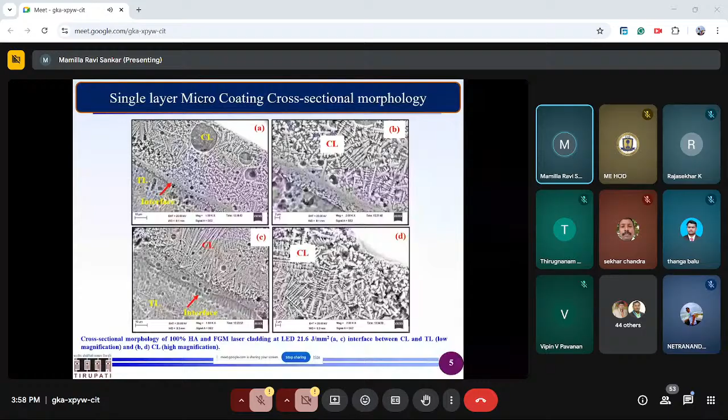Once you understand the surface morphology, we have multiple target materials also. So when we want, we can make FGMs. FGM stands for functionally graded materials, or functionally graded coatings; you can also say FGC or FGM. Once you understand the surface morphology, you can also go for surface metallurgy and other things.

Titanium is a highly reactive material, and at the same time a low thermal conductivity material. The good thing about it is that you will have a better transition layer, which means proper bonding and so on. Once you coat, you can also check with elemental mapping. Many mechanical engineers may not be well aware of elemental mapping. When you use SEM or FESEM, you have four options in EDS, energy dispersive spectroscopy: point analysis, line scan, area scan, and area elemental mapping. What you can do here is area elemental mapping.

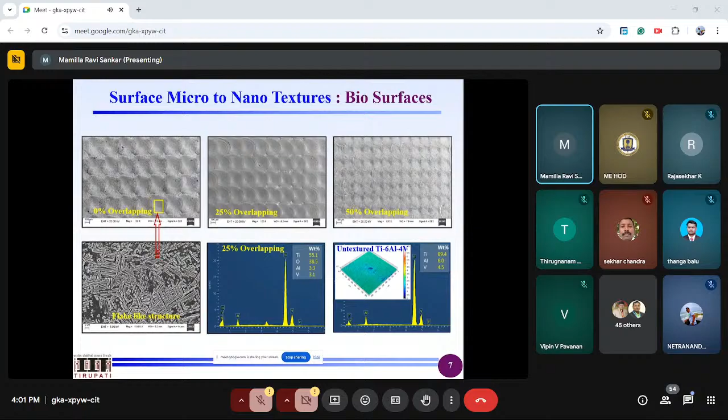I cannot say it is fully a new generation tool, but when you go to nanosecond or femtosecond lasers, these types are predominantly coming into picture now, and without much heat affected zone or recast layers, surfaces can be textured properly, as you can see here. Texturing can happen as per our requirement, but you need to play with the overlaps of the laser beams and so on.

Once you play with the laser beams and texturing, you can coat the materials required for orthopedic applications, and then look into the biocompatibility, as shown here.

What do we mean by biocompatibility? Whenever you place an implant inside the body, it interacts with the surfaces, similar to how mild steel put into water under environmental conditions forms a rusting oxide layer. In the body, this interaction forms an intermediate layer called the apatite layer, through which proteins and minerals can be exchanged with body fluids. That's the most important thing.

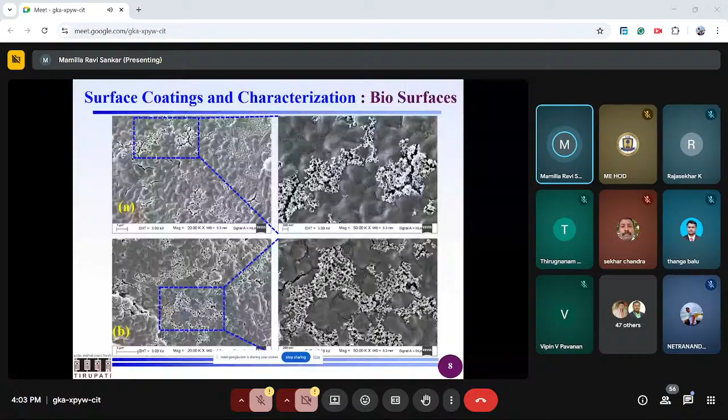When you test surfaces in artificial SBF, simulated body fluids, under in vitro laboratory conditions, you can express the surface in terms of the apatite layer. The flower-like white layers you see are called the apatite layer, which confirms this is a perfect surface for biocompatibility applications.

That's why you can then move into the next arena of cell cultures using MG63 osteoblast cells and so on, which is not shown here due to time constraints.

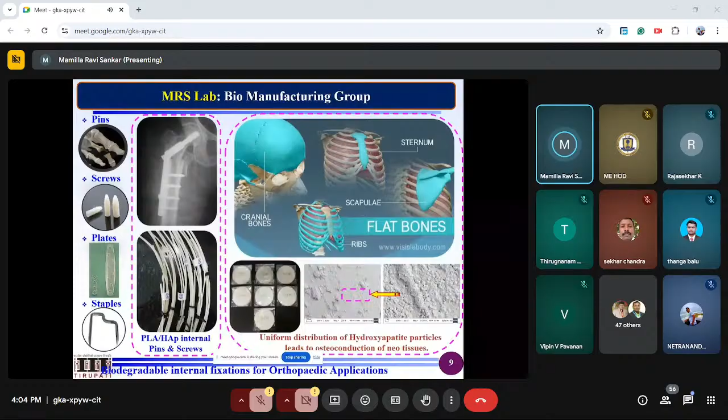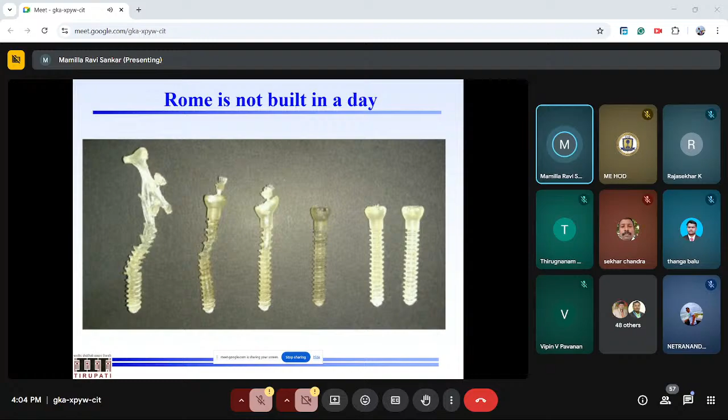Then we have another solution where we try to do biodegradable polymers for bioimplant applications. We develop these polymers in association with chemical engineering at IIT Guwahati, not IIT Tirupati, at this point of time, doing in situ polymerization as well as removing impurities from the surfaces. Then you can make the filaments and the implants basically.

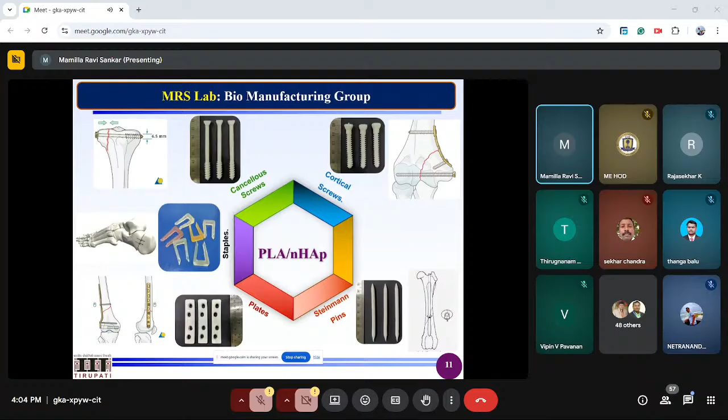This is not built in a day; it's not that easy to make as per ASTM standards in one go, because you need to play with temperature, flow rate, molecular weight and so on. So we optimized the melt flow conditions, for which rheology plays a crucial role, and then we try to make cancellous screws, cortical screws, Steinmann pins, staples, bone plates and so on.

The advantage is you can put it inside the body and don't take it out, so secondary operations may not be required. There is another solution that we are working on.

When there is a fracture, can I make an implant? You cannot always make an implant because the structures of fractures are very niche, micro or nano, and very complex in nature.

For this type of case, one has to develop rheological fluids. What are rheological fluids? As I said, we mostly work on polymer rheology, so we developed a thermosensitive magnetic scaffold for bone tissue engineering.

So what it means is you have a liquid at room temperature, about 25 degrees, and when you incorporate it inside the bone fracture, it has to reach the nooks and corners of the complex fracture surface, where you wouldn't need staples, cortical screws, cancellous screws or bone plates. You don't require the system you see here with bone plates and screws; instead you have support from the flesh, so you just push it in.

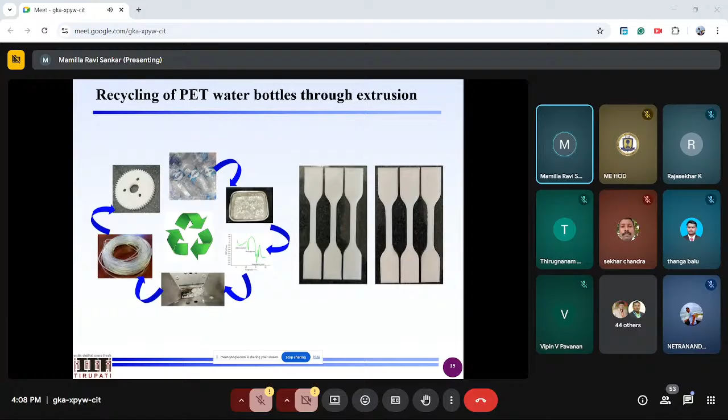So we have a machine called Lumen X Plus, which is from Cellink USA. Those who want more details, I will show you at the end what facilities we have. So we have Lumen X Plus, and BIO X also we are going to procure.

Sustainable additive manufacturing is what we try to do - we make plastic waste into 3D printable solutions, which is common. I'm not saying this is novel or something. What we try to do is make our own solutions for making filaments basically.

Here the good thing is, for biological hip implant, knee implant applications, many people are approaching us from various universities and industries for their applications, to make any type of filaments - for biological hip implants, knee implant applications, liners, hip liners, and other things. So we prepare, you name it, we prepare it. You want polylactic acid with carbon fibers, we can make polylactic acid with graphene, CNT, hydroxyapatite, copper, stainless steel, surgical steel - you name any material.

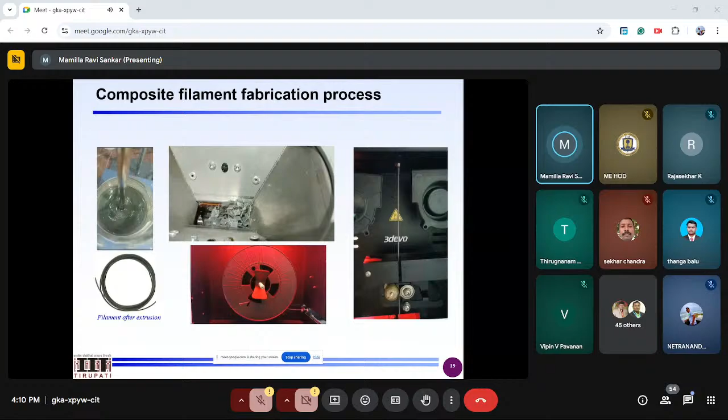Do your literature, come up with novel materials that you want to fabricate your filament for your PhD work or to publish. It's not just about PhD work, if you just want to publish the work, we can prepare it for you. It's a completely commercial system that we have, from the Netherlands actually. So this is the final extrusion filament that you can see here.

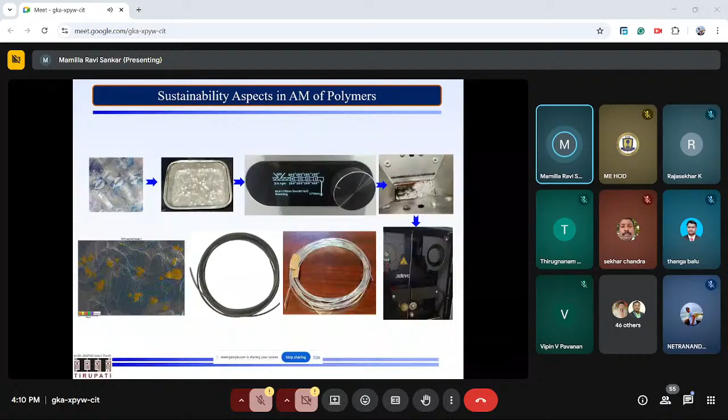So this is just what we are showing you. He is here, this is the one. We can make any type of filament you can see, and you can see at the end what this is previously, where the particles are aligned and how the particles look like here.

Now at the same time, to give you more of a glimpse, scanning electron microscopy images of these particular things you can see here. This can give you a lot of information - we can also make microparticle additions, nanoparticle additions, and nanosheets, whatever graphene flakes you want to use, any type, if you want thermal conductivity based filaments, any type of filaments. We are happy to provide as per custom requirements.

However, as I said, Rome is not built in a day. That means if you want the filament to be fabricated, this fabrication will have a lot of wastage because optimal composition will take a lot of time. Don't expect that today you have given and in a week or two weeks you are getting it. No, because we have a queue of things for our students' applications and so on.

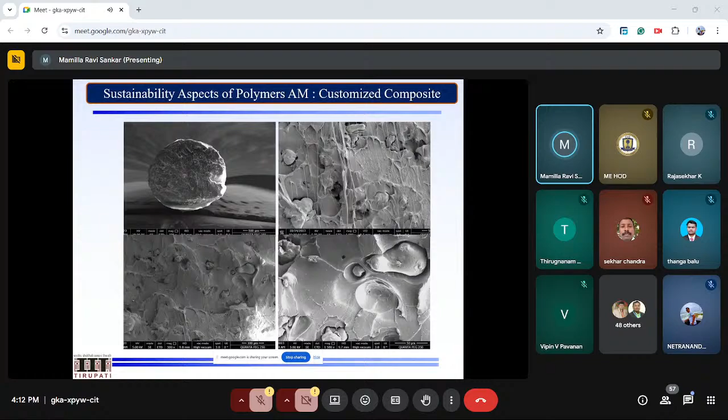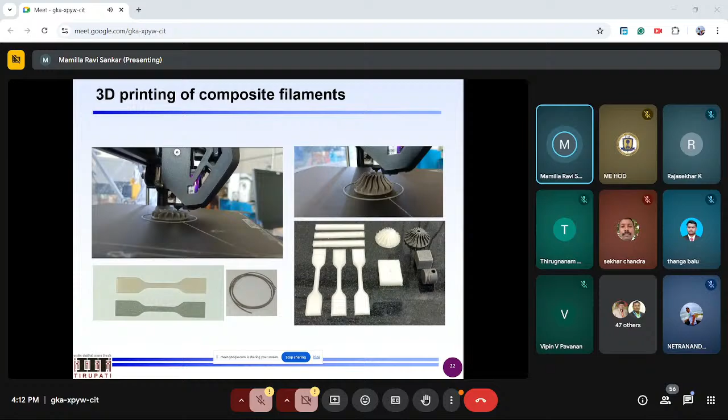At the same time, if I want to understand the melt-rheology of your composition, then first I need to do rheological applications. We have to plot what the melt flow conditions are, and see the loadings and so on. These are all required for your applications. Then we can go and do 3D printing. We have 3D printers, commercial 3D printers, and some customers also ask us to make components out of it.

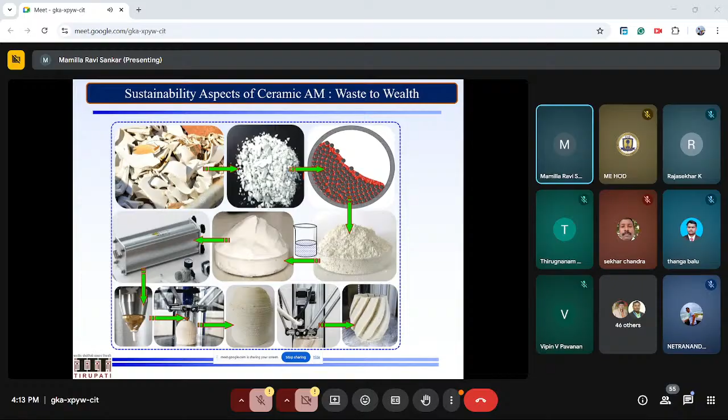So we are building this, and when the building is completed, you can see the component. We also do testing facilities, testing coupons, for companies to check samples and other things.

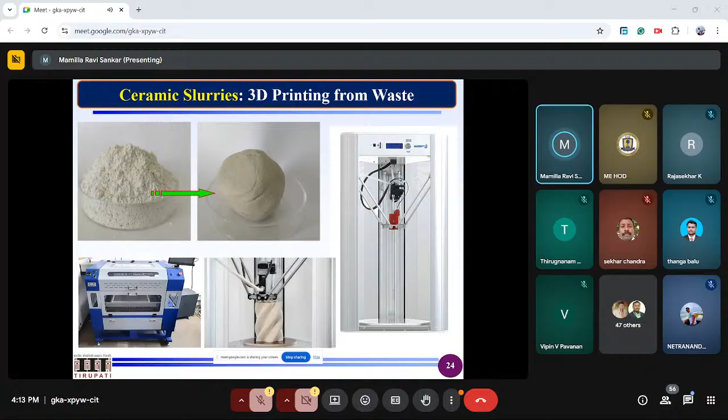Some other thing we work on is waste to wealth conditions. So porcelain powders, we can make into dough. We have two systems: one is the AMS Hyrel system, which as of today may cost around 40 lakhs. Then there's Delta Wasps, which may cost, depending on your application, 20, 25, 30, 35 lakhs and so on.

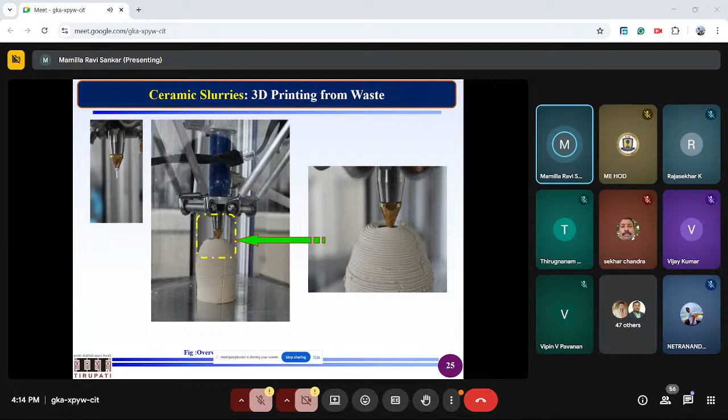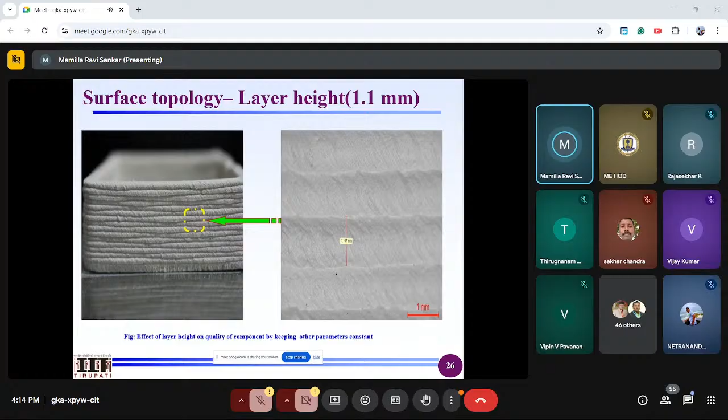And what is the novelty here? When there is a waste material available, as I said, we work mostly with polymers. So we develop polymer binders, and these binders play a crucial role in thermal debinding, chemical debinding, hydraulic debinding, and sintering operations, because you don't want these polymer binders to remain inside the ceramic structures.

As such, you can always create beautiful structures, and for these structures you can see what is the feed rate, what are the rheological conditions, and so on. Once you optimize all these things, you can make your own futuristic or complex component.

These are the complex components you can make with any materials. So what we try to do is develop compatible materials. Our area is purely on development of some binders, because you cannot join porcelain to porcelain directly—that is a big problem with ceramic to ceramic joining. So we always try to have binders for it, and it is not going to be that easy.

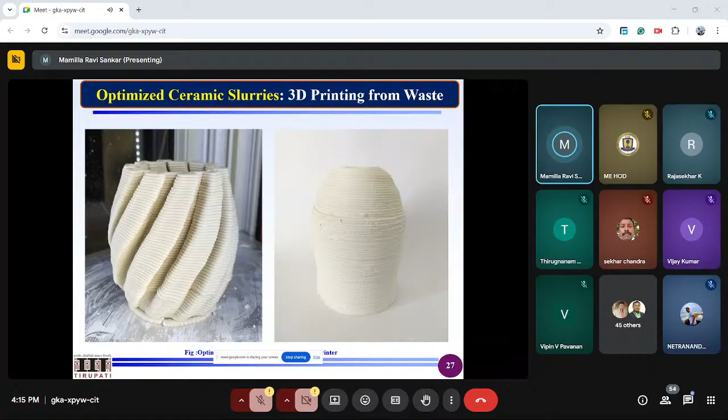One of our students, Palivella Bhargav Chandan, has done this work, and he is currently at IIT Delhi after completing his PhD. So we make binders—you bring the raw materials, we make the binders for you, we can print and show you the technology, and if you want, you can also go and patent the technology.

So as I said, let me start with micro machining. I don't know how much time I have—I think another half an hour maybe. So, sustainable micro machining: we try to work on various aspects, one of which is micro machining.

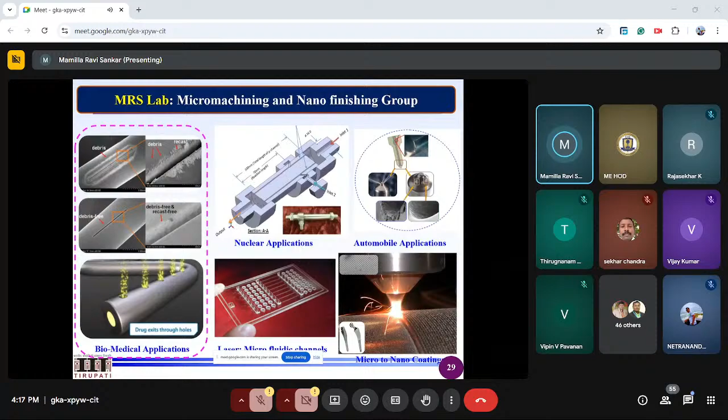My wish is to go up to 4:45 with the question and answer session. Professor, how much time do I have? Another 30 minutes? Please start, yes sir. 15 minutes? Actually your wish is up to 5, sir. What is your wish? My wish is up to 4:45, is that okay, sir, with the question and answer session planned? I plan to conduct the session between 3:30 and 5 p.m., so should I wind up by 4:30? Please, the session will be up to 5, sir, but based on your interest you can continue up to 5 also, no problem. Should I present up to 4:30 or 4:45 and then take questions? 4:45 is convenient for us, sir. So I'll present until 4:45, then start the discussion session, and then we will wind up, sir.

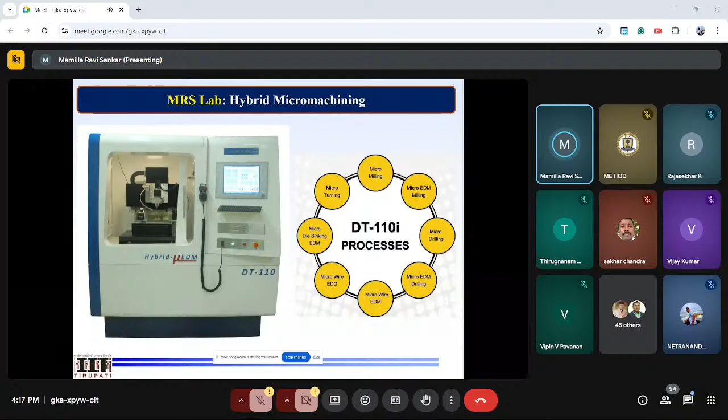Because I have almost 100 slides, I don't want to cover everything as it's time consuming. So, micro machining again—DT-110i, what is an intelligent machine. Whatever you are seeing is DT-110. We have the DT-110i, an intelligent machine comprising micro milling, micro drilling, micro turning, micro EDM, micro EDG (electric discharge grinding), micro ED milling, and micro lasers, with simultaneous EDM and ECM.

We have a lot of attachments.

Okay, so you can see here the beauty about this particular thing is you can make whatever small shafts you want, or electrodes that you can make for machines. For this you require very sophisticated tools such as PCBN tools, micro tools, whose nose radius will be less than 0.1, and other things. Normally, in a turning process, you use conventional cutting tools.

So what you do predominantly is that you will have a variety of cutting tools, like what you are seeing, a triangular cutting tool here. The conventional cutting tool here is the TPUN 160304. These are the common cutting tools, where T stands for triangular, and 04 stands for 0.4 nose radius. Or TPUN 160308, where 08 stands for 0.8 nose radius.

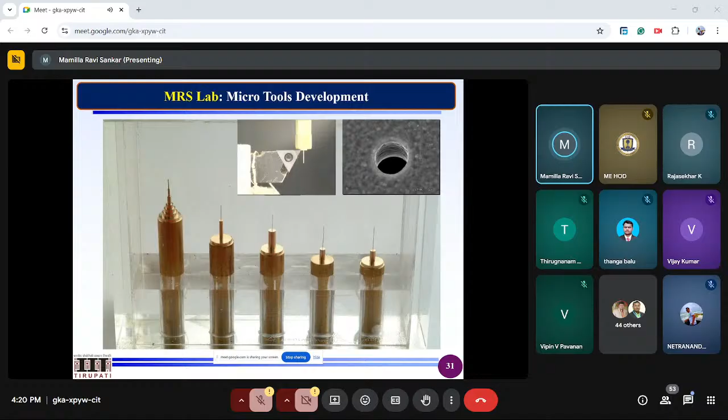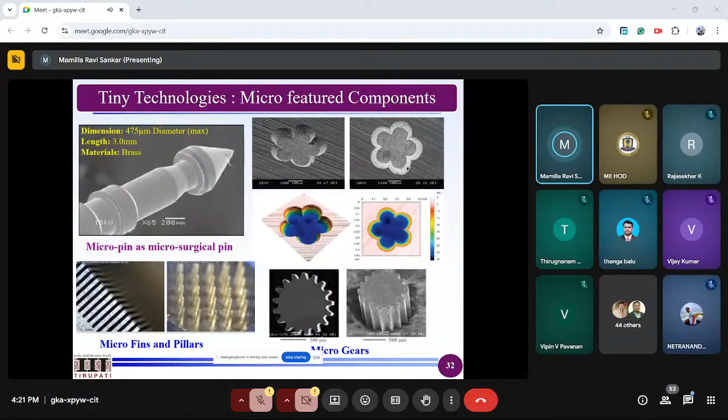So we'll put a slab or a rectangular piece. Now I start, because I have rotation of the workpiece there. Because of electrical discharging while rotating, it is non-contact, and because of that you can make your own tool. Whatever shapes you want, you can manufacture arrays of tools and so on. So if I want to make these, I need to plan my process and my cutting tools in a better way.

As I said, there are applications not only in highly conducting materials but also in low conducting materials like silicon, for semiconductor applications, sensor applications and so on. So if you see here, micro ED milling. Why micro ED milling? Because you can rotate your tool. Otherwise it is only die sinking. That is also there, and this is also there.

If you go for simultaneous EDM and ECM, that is electric discharge chemical micro milling, you get the EDM process of melting and evaporation and at the same time anodic dissolution. The combination of that, which is patented, with the micro tools and the electronic circuit, can do wonders. The surface roughnesses are much better. The application is whenever you want to mount sensors on it.

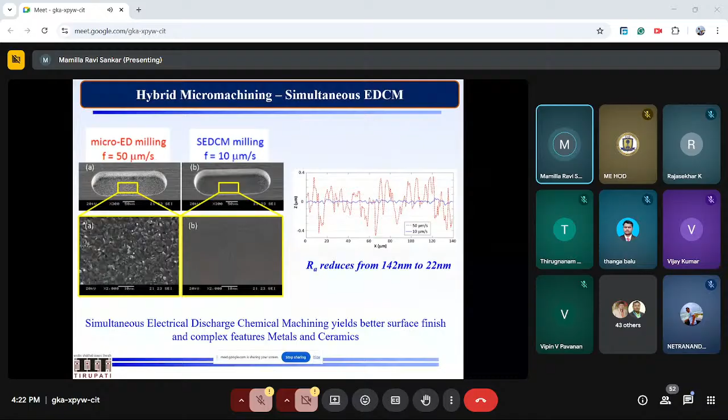If you use the first one, with very rough conditions, these may hamper your signal because a lot of air entrapment will be there. With air entrapment, the noise will be very high. In simple language, if you go for better surfaces, your noise levels will be very low, so the signal to noise ratio will be better. Okay, so this is again a new way of understanding the problem.

As I said, next generation cutting tools. This is one of the next generation cutting tools which are going to come by 2030 or 2040, or Viksit Bharat 2047, you can just say. So this is the biological tool. What is the biological tool here? It is a cylindrical structure basically.

Then on the other side we have copper, which has a positive mask, I mean, photolithography. So you have photolithography done, that you can see here. On one side I have Acidithiobacillus ferrooxidans, on the other side I have a copper plate on which photolithography is done. I have coated and extracted the coated polymer layer in the required dimensions. The required dimensions here is a micronozzle, or at the bottom you can see a micromixer.

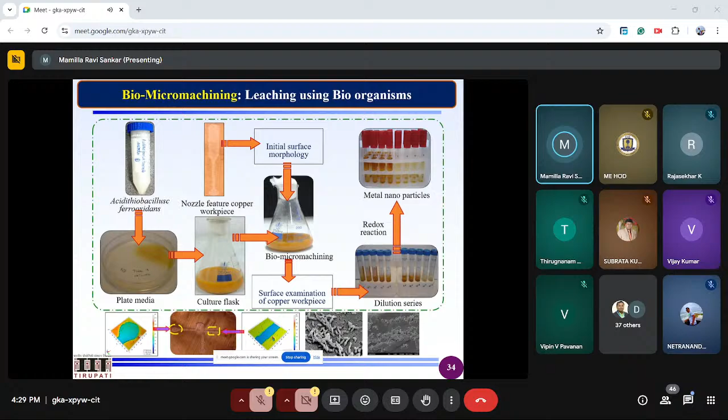So indirectly, if I want copper microfluidic structures and at the same time copper nanoparticles, you can extract both without wasting anything. For that, the future is very bright. Those people who are interested, we are mostly looking for people who work in similar lines. At the same time, we are happy to say that this particular paper got the first best paper award at IIT Madras. We were surprised, in fact, because we got the first best paper award.

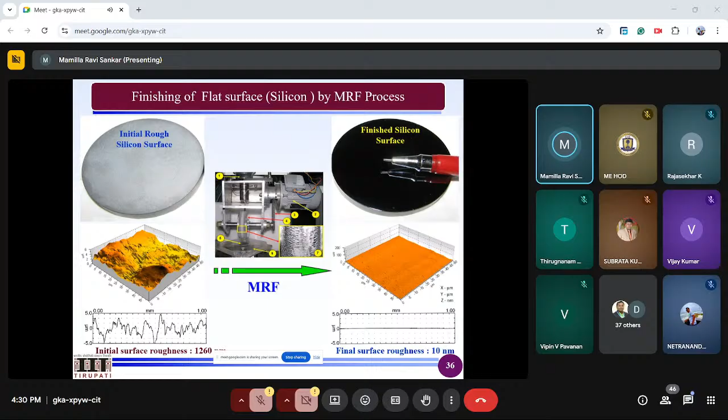There was the first place, second place, and third place, and we are very fortunate and thankful to IIT Madras for giving us first place for this bio micro machining, or micro machining using microorganisms, which is the next generation cutting tools.

So nano manufacturing, as I said, we try to work on some of the abrasive fluids, which you can see here. So chemomechanical polishing, designing of highly reactive materials, and then you play with the magnetic field, so chemomechanical magnetorheological finishing. On one side you have MRF or MRP, magnetorheological polishing, or magnetorheological fluid. Predominantly the fluid will be some oils, some surfactants, abrasive particles, and so on.

At the same time, we will have some agents, which are chemicals, so you can make chemomechanical slurries. And since you have CIP particles, which are carbonyl iron particles, normally 99% pure iron particles, they will form chains from the North Pole to the South Pole, where the diamond particles or any other abrasive particles are entrapped, and you just have to finish it.

So initially, the surface roughness is predominantly high. In these circumstances, you should always go for high magnetic field intensity, say 1 Tesla or above, then you can do the finishing operation. As it progresses, you can play with the electromagnet, where you can change to 0.5 Tesla and 0.25 Tesla, or 0.6 or 0.3 Tesla. So the strength of the magnetic field intensity for the CIP chains lessens as the surface roughness decreases. You don't require high indentation values and so on.

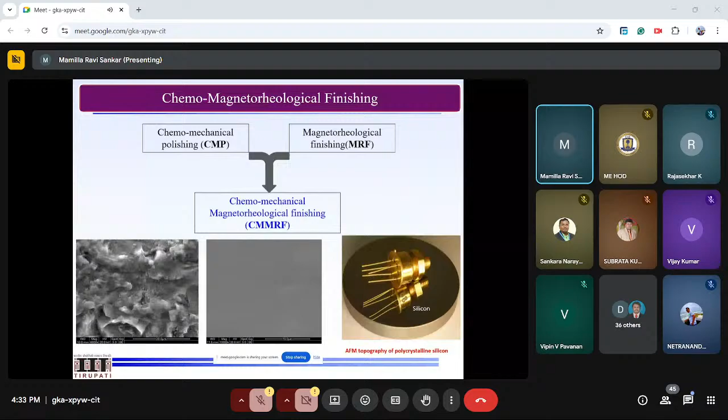So if you're going for 1 Tesla, your grade of the grinding wheel is hard grade. As you progress downward, say 0.6 Tesla, you will have a medium grade. And when you come to 0.25 to 0.3 Tesla, you're going to have a soft grinding wheel where you can do the fine finishing operation. That's the beauty of this particular process: you can get it in situ. In conventional grinding, you require 3 grinding wheels: hard, medium, and soft. However, here you can play with the magnetic field.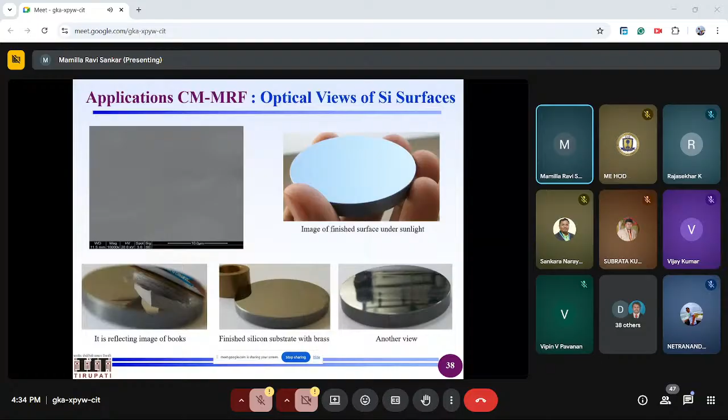As you can see the surfaces, for people looking at semiconductor manufacturing: in the next 5 to 10 years, India is putting a lot of money into semiconductor manufacturing. The world is looking at India for semiconductor manufacturing applications. So for those interested in semiconductor materials, fabrication, and characterization, IIT Tirupati is one of the hubs for testing of electronics. At the same time, we're also working closely with the hubs which are going to fabricate semiconductor materials and so on.

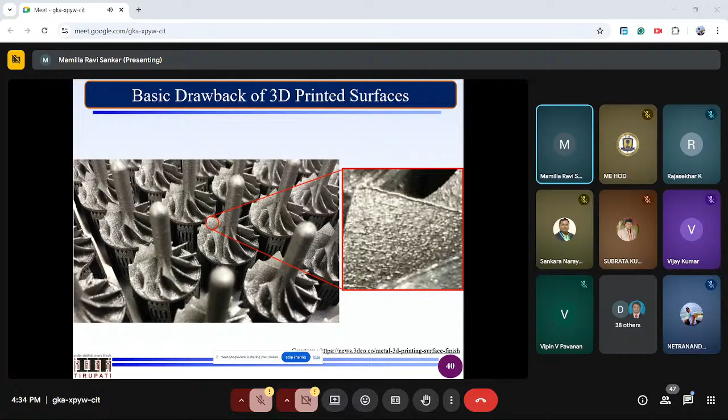So now, if you have time, I'm going to show you the new tools that we have developed. As you see here, surface finish is a big challenge in additive manufacturing, so obviously you need to resolve it. So what we try to do is understand the surfaces. In additive manufacturing, you require very complex surfaces, and you fabricate them by laser powder bed fusion, WAAM, and so on.

If you see the surface under scanning electron microscopy, you see surfaces like this. If you use these surfaces in practical conditions, it will completely destroy the system. That's why whatever 3D printing people do is a partial job, not a complete job. You need a lot of post-processing technologies, and one of them is the finishing process. Why do you need to do the finishing?

So you need to do the deballing. Whatever you are seeing, the spherical balls, it's called balling effect. You need to do the deballing. You need to reduce the roughness, and you need to reduce the waviness.

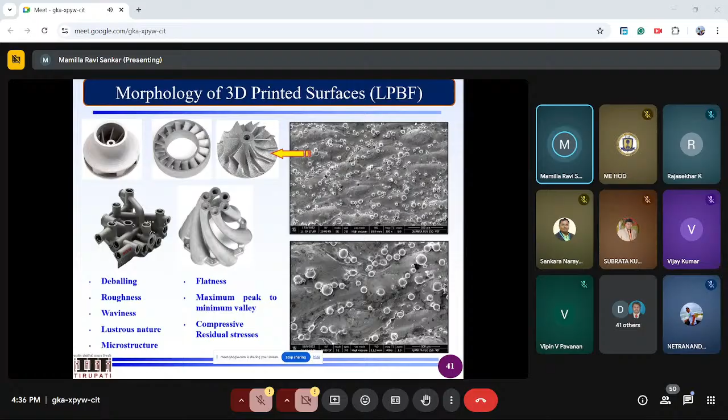So as the world progresses, the complexity progresses, the wishes of humans increase and the requirements of the customers will increase. So as a manufacturing engineer, you should always be ready for the new challenges that you are going to face. So what do we try to do? What we try to do at IIT Tirupati is converting a 3D printed component into a practically usable form.

As I said again and again, 3D printing, having a 10 crores machine, a 20 crores machine, a 5 crores machine, or any machine that you have, is a partial solution for the practical problem. It is not a complete solution. So if you print it, you have done 50% of the job. If you want to put it in a practical application, you need to do a lot of things.

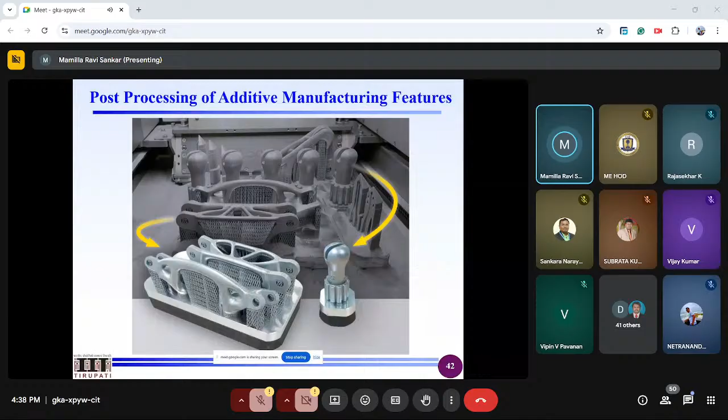Sintering you need to do. Sometimes HIPing you need to do, hot isostatic pressing. Then you need to do finishing. You need to do a lot of microstructure analysis, and so on. So you definitely have a lot of jobs. Okay.

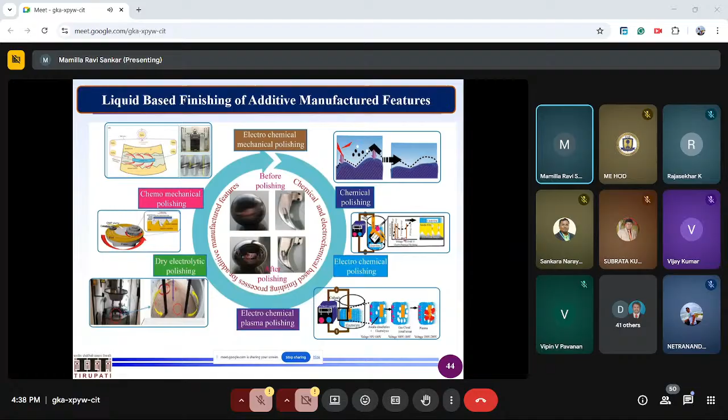So what we try to work on is chemical, electrochemical, plasma, dry electrolytic, abrasives, so a lot of technologies that we have at IIT Tirupati, and we are happy to say that we have one of the best facilities at IIT Tirupati in terms of converting a 3D printed component into a practically usable form.

Okay, I will just give you a glimpse of the overview because I have another 5 minutes to wind up. I'm not going to talk on abrasive based. I'm just going to close on abrasiveless-based advanced cutting tools. The first cutting tool that we work on is chemicals that we develop. So you have dynamic chemical technologies and static chemical technology that you can do here, and you can make your own applications. You just put your components inside, and you can see here before and after chemical polishing.

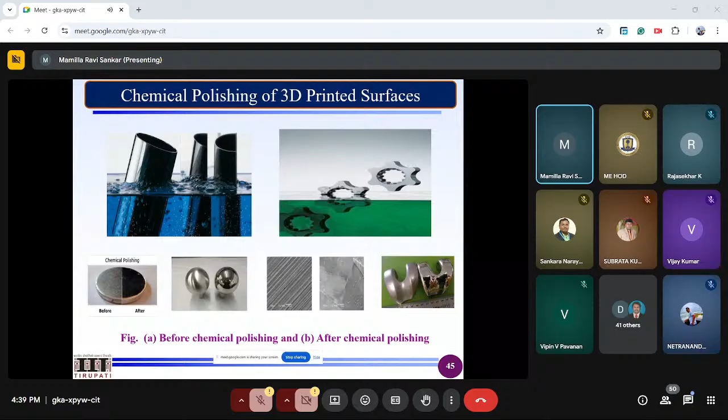So we design and develop the digital materials. In terms of this one, my digital material is a chemical composition. So first, what I want to understand is metallochemistry. What is the composition of the metal or alloys or metal matrix composites, whatever 3D printed components we receive. And we play with respect to our existing knowledge on these chemicals. That gives rise to some of the finishing processes, which is called chemical finishing.

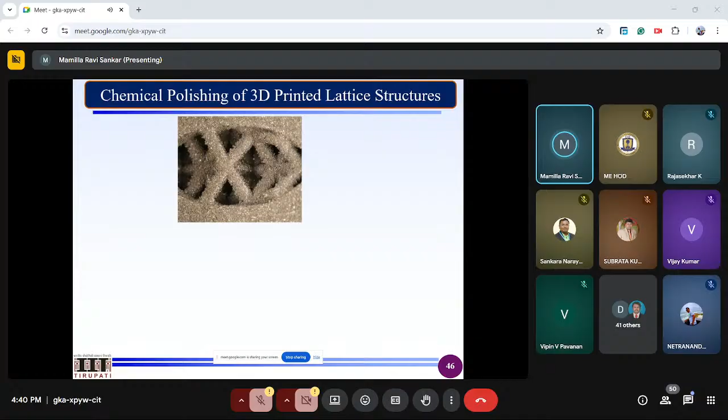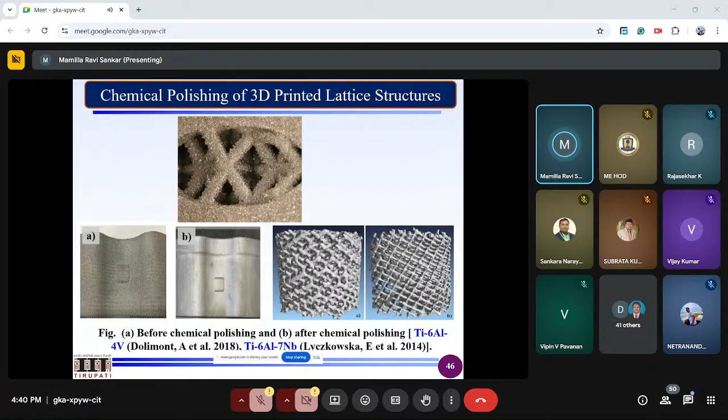One of the predominant processes in additive manufacturing is generating lattice structures. 3D printing companies develop very, very complex lattice structures. But when it comes to finishing them, it's very, very difficult. That's why one of the solutions people use is chemical finishing, dynamic chemical finishing, dynamic nano chemical finishing and so on, which we try to use.

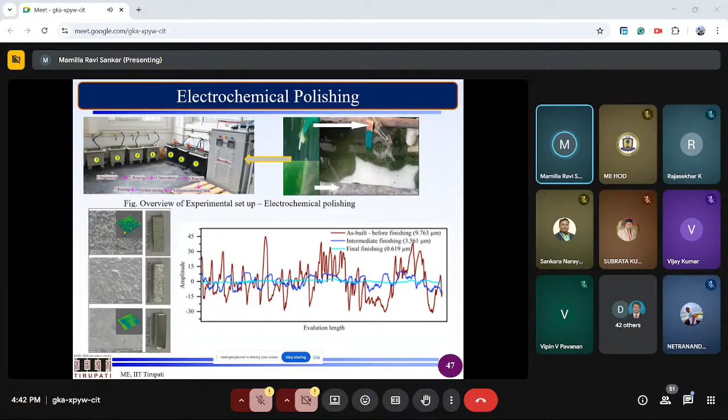This is electrochemical polishing. You will have an electrochemical solution, I mean to say electrolyte, which you need to throw away. These electrolytes are sometimes compositions of chemicals. So disposing of these particular chemicals is very, very critical and complex. So that's why we opted for this particular process, the electrochemical plasma polishing process.

Electrochemical plasma polishing process, where salts are utilized. So the salts are utilized here, and you can see disposing is very easy. 200 liters of water is there where I am going to put 3 to 5 kgs of salt. Okay, so disposing of this is not a big concern because we are within the limitations of the so-called government, I mean the so-called organizations, health organizations, and so on.

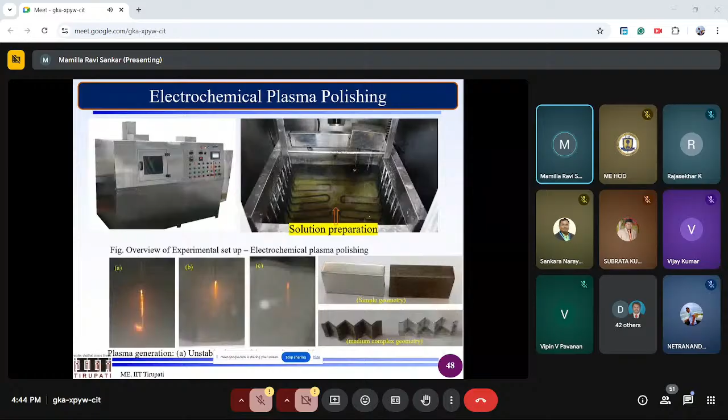So, what is the beauty about this particular process? You can see here, clustered additive manufacturing components. It can give you a beautiful shine. These are the tire mounts, serrations, and other things. It will give you a fantastic lustrous surface finish. It will be very good, and it shines a lot.

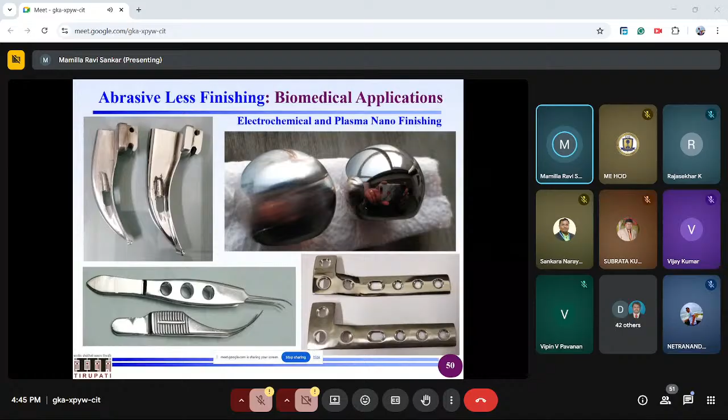However, if you see, the surface roughness values are approximately the same. So there is not much difference in the performance, but there is a high difference in the perspective. So when you are purchasing biomedical implants, the perspective of the human also plays a crucial role.

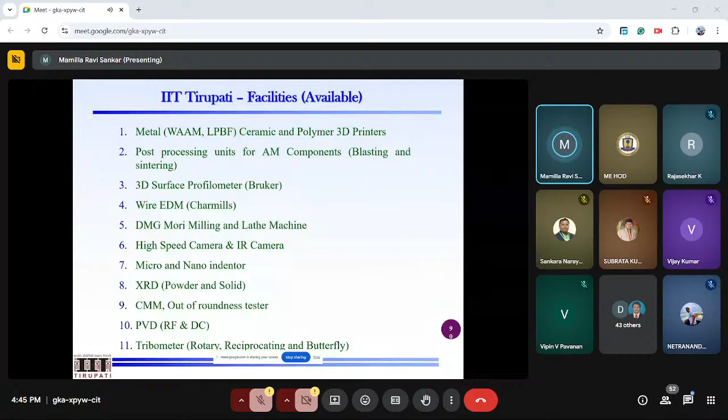I'm just going to show you the facilities available. These are the best facilities that we have. We have metal additive manufacturing, ceramic additive manufacturing, polymers, post finishing, 3D surface profilometer from Bruker. We have wire EDM, we have from Charmills, which is one of the world's best, DMG Mori milling and lathe. We have high speed cameras and IR cameras, micro nanoindentor, XRD.

We have CMM, out of roundness tester, PVD, as I said, RF magnetron sputtering, single target and multi target, and pulsating DC. We have a tribometer with rotary, reciprocating, and butterfly motions. Some of the facilities arrived: 3D filament making, micro machining center, laser micro machining center. These 1, 2, 3 we have received. EDM, die sinking EDM, which we are about to get.

FESEM with EBSD, EDS, and lithography, which has just arrived. Installation is due, as per my understanding. Atomic force microscopy, which we are going to get in a couple of months. PPMS, physical property measurement system, which is a very, very expensive machine, like 18 crores, which we are going to get. And XPS is also on order. Next year, we may be getting high resolution transmission electron microscopy.

LIBS, laser-induced breakdown spectroscopy, we already have. It is one type of spectroscopy. DSC, TGA, we have incubators and so on. Fatigue testing, friction stir processing, and other things.

We are open for summer interns who can come for long durations, like 5 to 6 months. Being a young institute, we don't have accommodation now. So if you are interested and can handle your lodging and boarding, we can give you research space, consumables, and so on, so that combined, your institute and our institute can publish. We are looking at some project work.